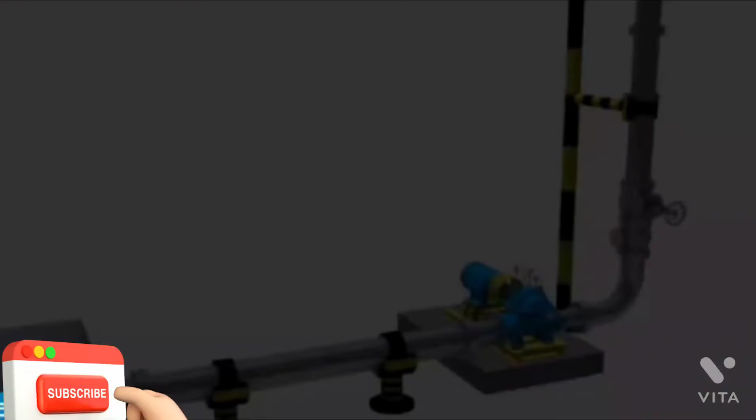When properly installed and given reasonable care and maintenance, centrifugal pumps should operate satisfactorily for a long period of time. The axially split casing design allows removal of the impeller and bearing housing assembly without disturbing the suction and discharge piping.

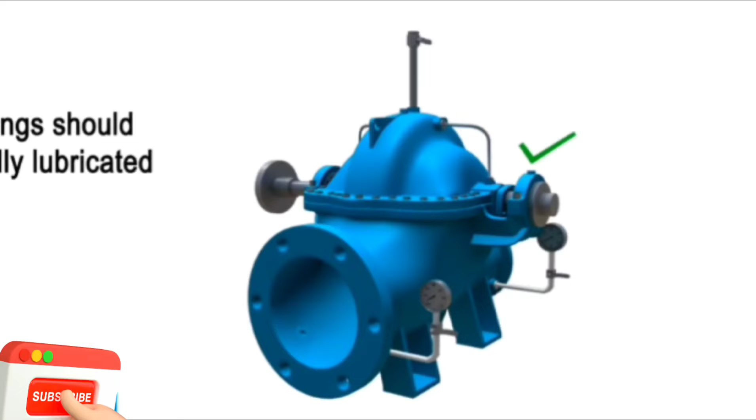Storage and protection.

All pumps are shop tested and ready for operation when delivered. If equipment is to be stored for long periods of time, six months or more, it should be kept in a clean, dry area, and the following precautions should be taken to ensure that the equipment remains in good condition.

Be sure that the bearings are fully lubricated. The shaft should be rotated 10 to 15 revolutions by hand periodically in order to spread the lubricant over all the bearing surfaces. Suitable intervals are from 1 to 3 months.

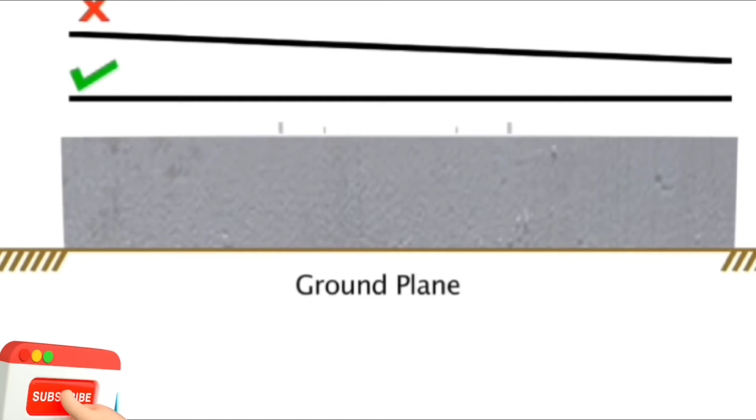Installation: the pump should be located as close as possible to the liquid supply so that the suction line is short and direct. Location should require a minimum of elbows and fittings in the discharge line.

Before installing the pump, ensure that the foundation on which it will be placed is well prepared. It must be sufficiently substantial to take the weight of the pump and absorb any possible vibrations. The foundation has to be absolutely straight, without any inclination or tilting on any side. The foundation bolts of proper size should be embedded in the concrete and the base plate tightened, ensuring that it is level in all directions.

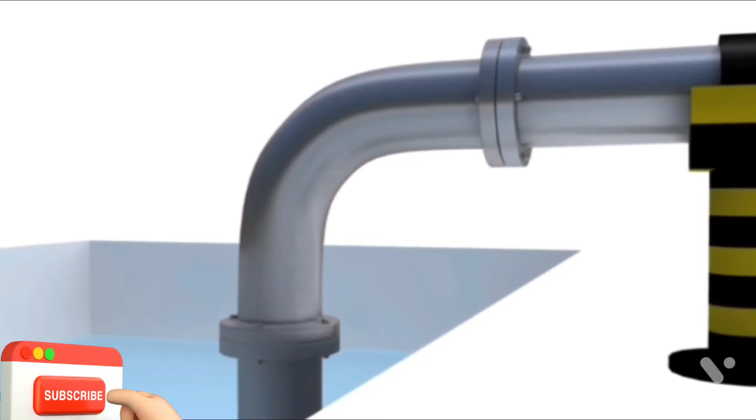Piping associated with the pump must be anchored and supported independently of the pump and should never put any strain on the pump casing. When the pipes are not supported, their weight is borne by the pump casing and may cause them to crack or deflect. It is important that the connections be carefully aligned axially, angularly, and in length.

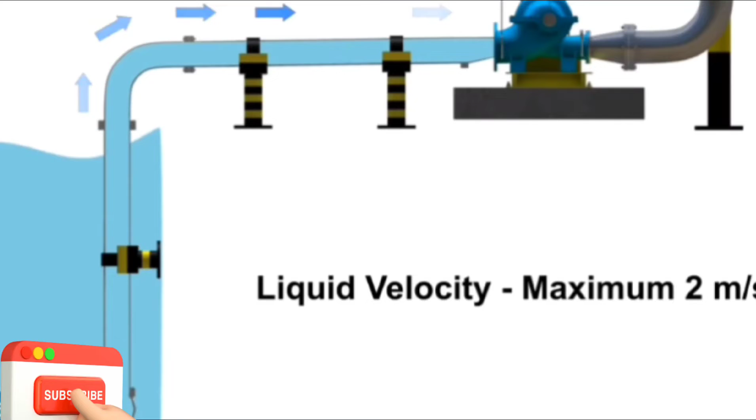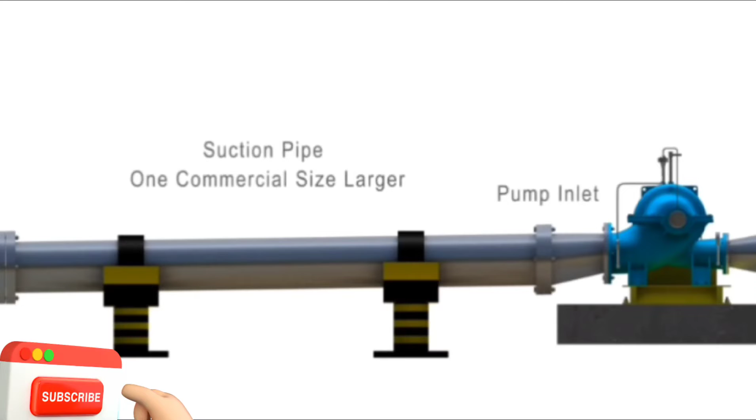Suction piping in case of static suction lift condition, negative suction: the piping run and the connection fittings should be properly aligned and supported separately. The elbow should be of long radius type.

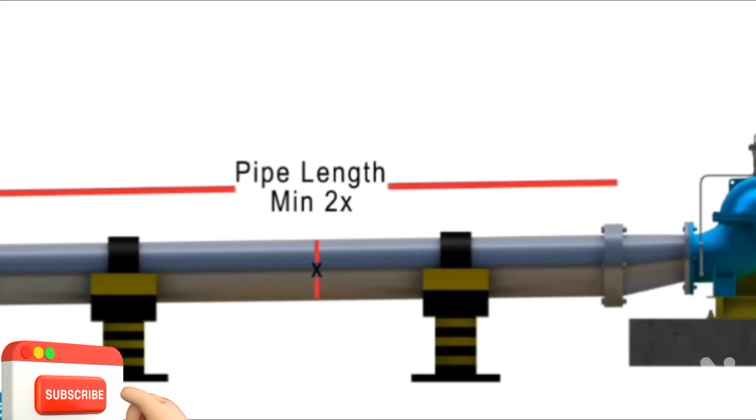All suction piping must be airtight. The suction pipe should be sized to ensure a liquid velocity of not more than 2 meters per second. All suction pipes should have a continuous rise to the pump suction inlet, with a recommended slope of 6 mm per 100 mm. The recommended suction pipe size should be at least one commercial size larger than the opening of the pump inlet. No isolation valve is recommended. There should be a tapping provided for installing a vacuum gauge in the suction line.

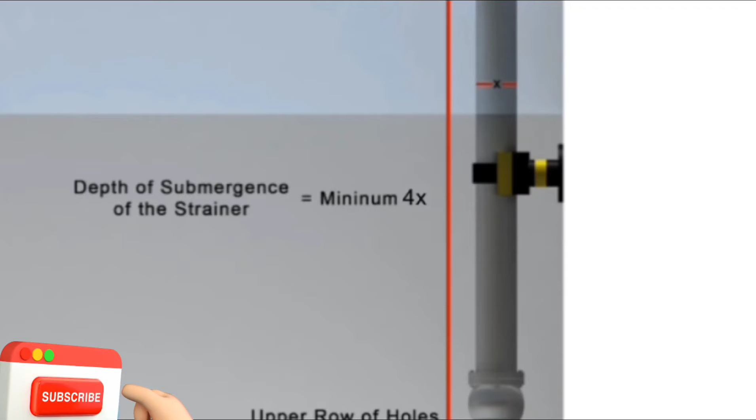The reducer joining the straight length of pipe in the pump line should be an eccentric reducer, with the inclined side of the reducer as the bottom side. The straight length of pipe after the eccentric reducer should be 2 times the pipe diameter.

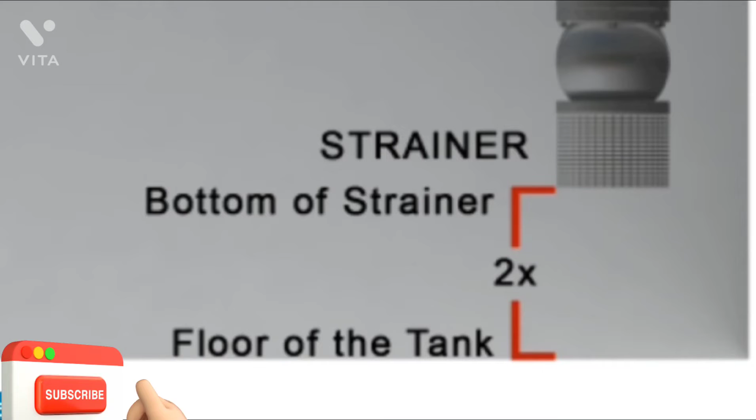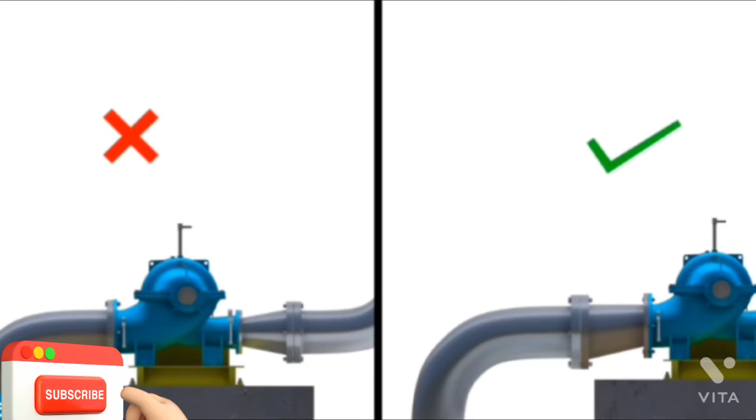The suction strainer must be at least 4 times the suction pipe area, and the mesh size should screen out solid particles that could clog the impeller. The minimum depth of submergence of the strainer should be at least 4 times the pipe diameter, measured from the upper row of holes of the strainer. The distance between the bottom of the strainer and the floor of the tank should be considered as 2 times the pipe diameter. A stream of liquid falling into the sump near the intake pipe will draw air into the liquid.

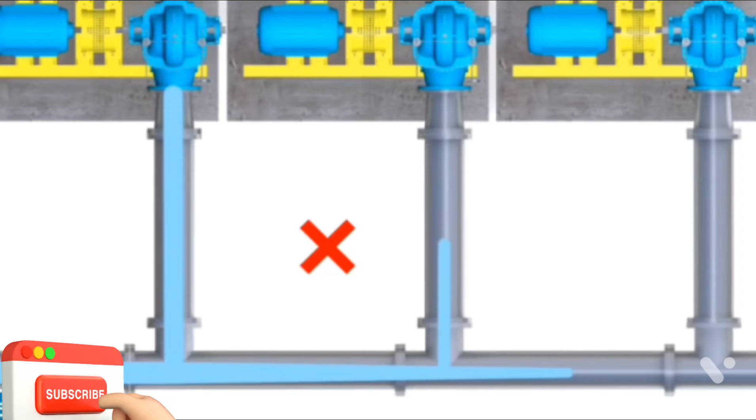The supply line should extend down into the liquid. A short elbow should never be bolted directly to the pump's suction nozzle. The disturbance in flow caused by a sharp bend so near the pump inlet may result in noisy operation, loss in efficiency and capacity, and heavy end thrust.

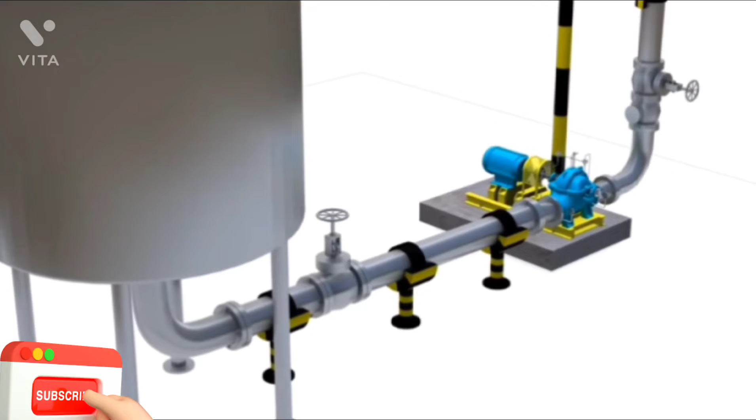If separate suction lines cannot be used for each pump, then a tapering header with Y branches should be used. A straight branch header should never be used.

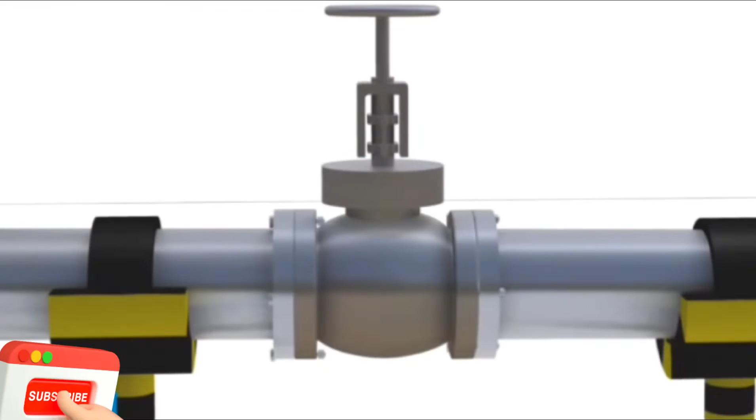Suction piping in case of flooded suction condition. Positive suction.

In case the water is being supplied to the suction through gravity, for example an overhead tank, a slightly different setup is needed.

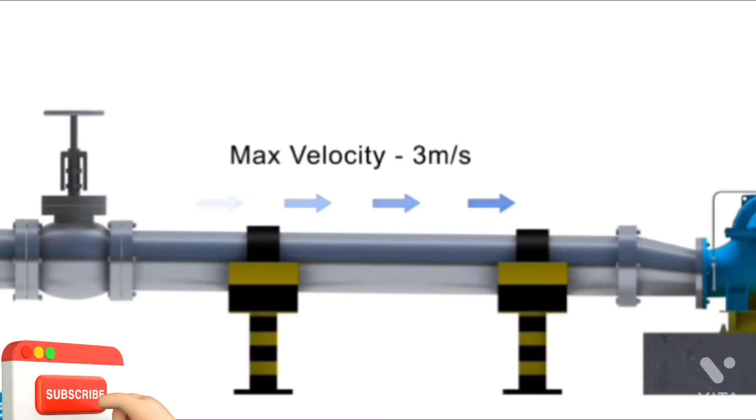The elbow should be of standard type or of the long radius type. An isolation valve should be provided in the suction line. The pipe supplying from the tank into the pump should have a descending inclination.

The straight run of the piping leading to the pump suction nozzle should be at least 3 to 6 times the diameter of the pipe from the upstream elbow. The suction pipe should be sized to ensure a liquid velocity of not more than 3 meters per second.

There should be a tapping provided for installing a pressure gauge in the suction line. The reducer joining the straight length of pipe to the pump line should be an eccentric reducer with the inclined side of the reducer as the bottom side.

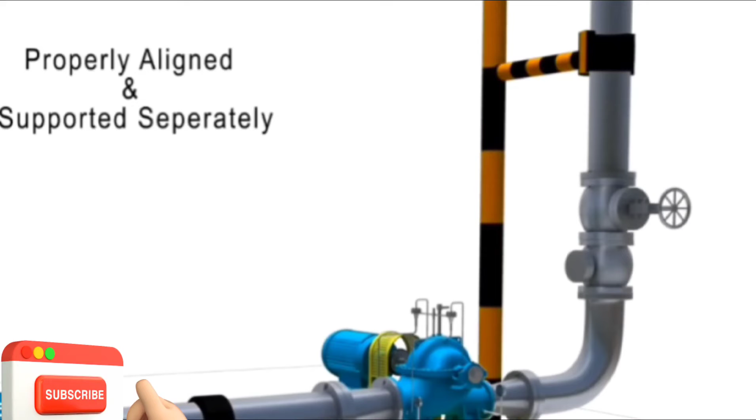Stuffing box seal connections are usually made from the top of the pump casing. If the liquid being pumped is unsuitable for sealing, then it is preferable to bring fresh, cool water to the seal connections from an outside source.

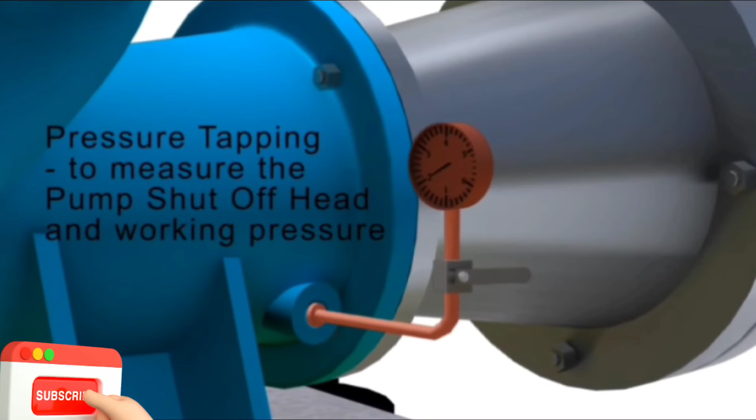Centrifugal separators or other filters may be used to remove abrasive particles from the liquid being pumped if an outside source is not available.

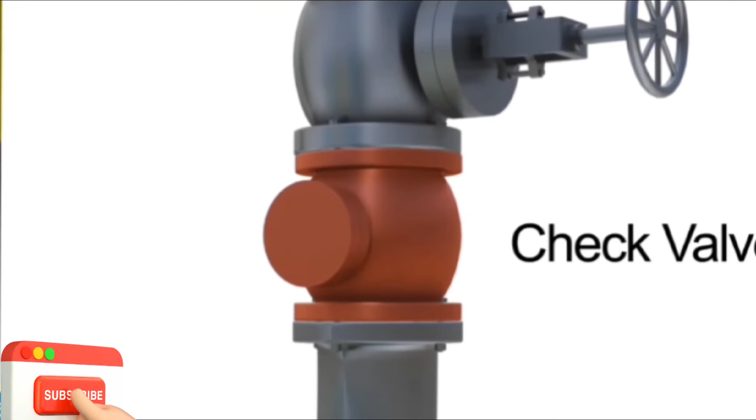Description of the discharge pipe. The piping run and the connection fittings should be properly aligned and supported separately to reduce strain on the pump casing.

There should be a pressure tapping as close to the pump outlet and before the isolation valve as possible, to measure the pump shutoff head.

Concentric reducers are installed in the discharge pipe to minimize friction losses. The check valve used in the discharge should be of the non-slam type to prevent reverse flow and protect the pump from excessive back pressure.

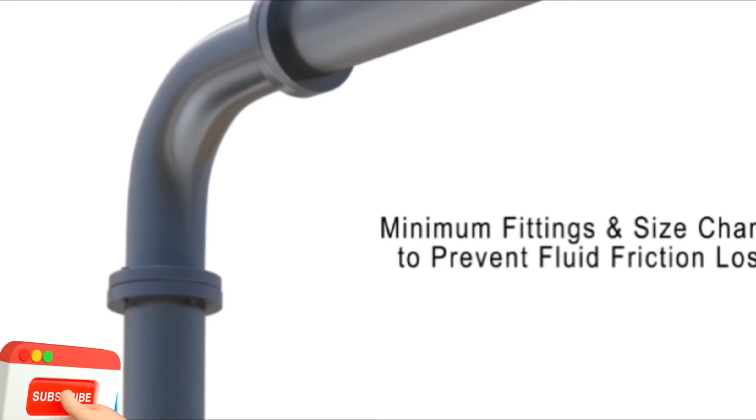The isolation valve is provided downstream of the check valve so that these can be taken up for maintenance, priming, and starting whenever required.

The recommended discharge pipe size should be at least one commercial size larger than the opening of the pump outlet. The number of fittings and size changes should be minimum to prevent fluid friction losses.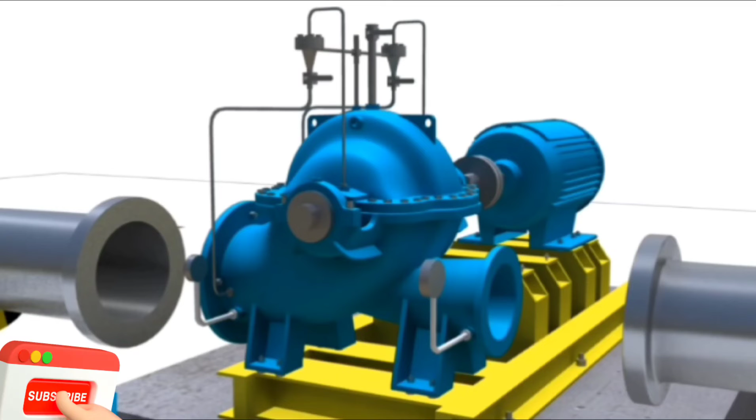Expansion joints may be used only after a careful piping analysis, especially when the discharge pressures are on the higher side.

Installation of pump and prime mover. The pump and motor unit needs to be fitted firmly onto the base frame using nuts and bolts before fitting in any pipes. It is essential to confirm the distance between the shaft ends.

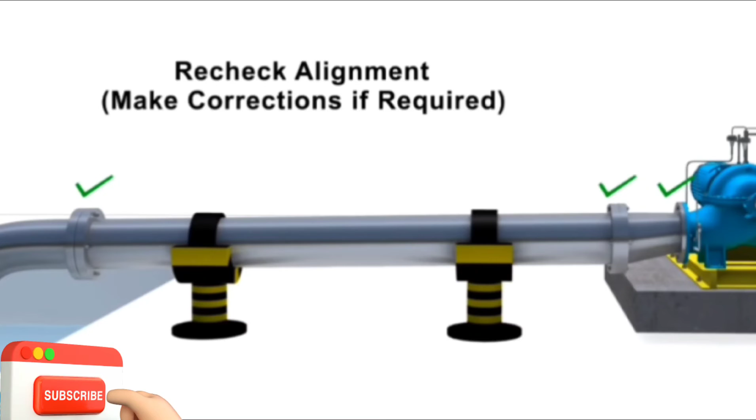In the subsequent step, the pump and motor are aligned to the final tolerance using a reverse dial gauge or a laser alignment tool.

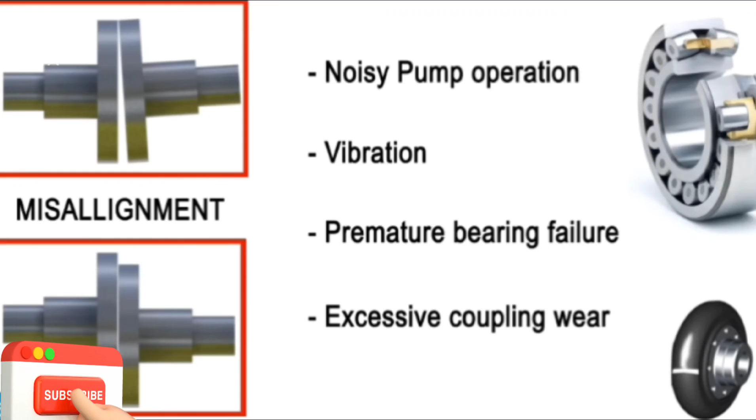After the alignment is completed, the piping associated with the pump should be bolted. Once this is completed, the alignment should be rechecked and similar readings should be obtained. If this is not the case, then the piping should be investigated and suitable corrections should be made.

If this is left unattended, it can cause stress on the pump casing. Misalignment may be the cause of noisy pump operation, vibration, premature bearing failure, or excessive coupling wear.

Once the pump and motor have been coupled, test the movement manually by rotating it by hand to see if it is rotating smoothly.

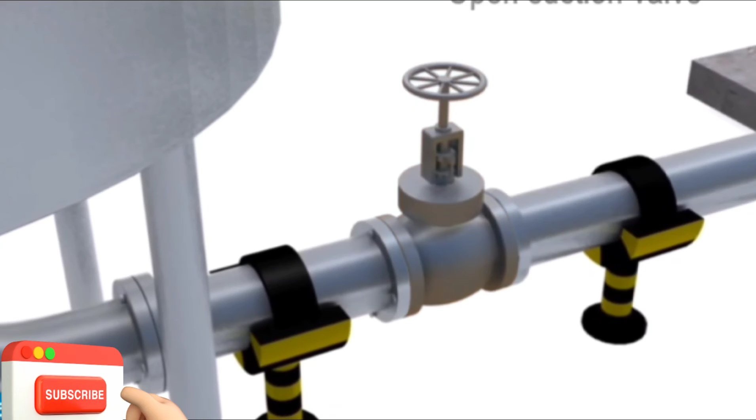Operation. Before bolting the coupling halves together, check the drive rotation to see that it matches the pump rotation.

Starting. When possible, turn the pump shaft by hand to ensure that the parts do not bind. Check the bearing lubricant.

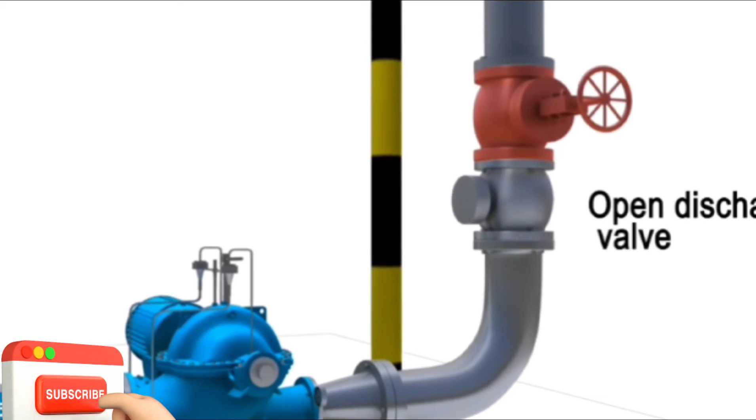Open the valve in the pump suction line if fitted. Close the discharge valve. Prime the pump. Open valves in stuffing box seal lines if fitted.

Start the driver. Open the discharge valve slowly when the pump is up to speed.

Adjust the packing gland until there is a slight leakage from the stuffing box. Mechanical seals need no adjustment. There should be no leakage.

Shut down. The pump may be stopped with the discharge valve open without causing damage. However, in order to prevent water hammer effects, the discharge valve should be closed first.

Close the discharge valve. Stop the driver. Close the water seal valves.

Close the valve in the pump suction line if fitted. If danger of freezing exists, drain the pump completely.